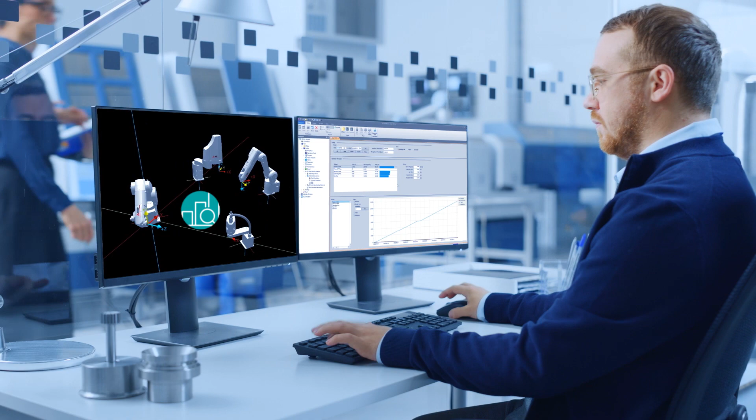I want to know the robot's condition at the time of introduction or the robot's daily operating information. Is this something you are concerned about?

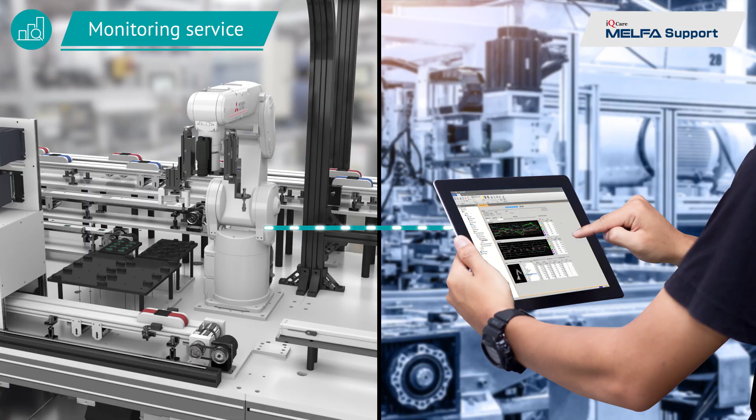The monitoring service automatically compiles the robot's daily operating information and monitors the operating information and the conditions of the component parts on a daily basis. Data related to robot operation and maintenance are automatically backed up every day. Robot operating information or controller control information can be visualized in cumulative graph or chart views. This supports analysis of operating conditions or checking whether maintenance is needed.

I'm having problems with the robot system suddenly shutting down. Is this something you are concerned about?

You can recover the settings for the robot's condition on a specific day from backup data, which helps reduce recovery time.

I want to know the timing of robot maintenance before actual operation, such as at the time of introduction. Is this something you are concerned about?

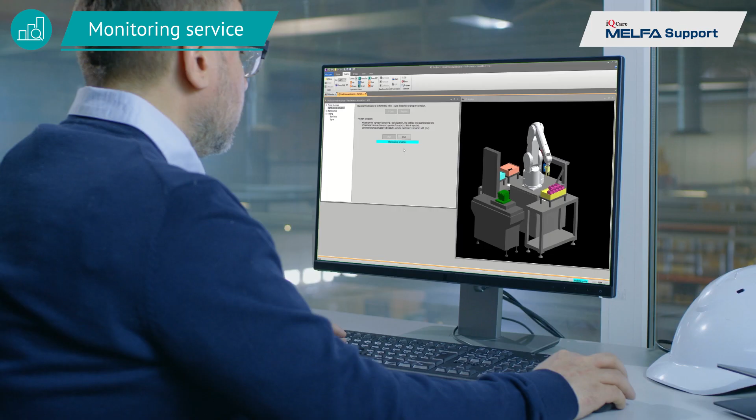The maintenance simulation function calculates the timing of maintenance through simulation in advance. Robot program motion patterns are repeated with the actual equipment or in RT Toolbox 3 to estimate when to replace maintenance parts or when to recommend maintenance.

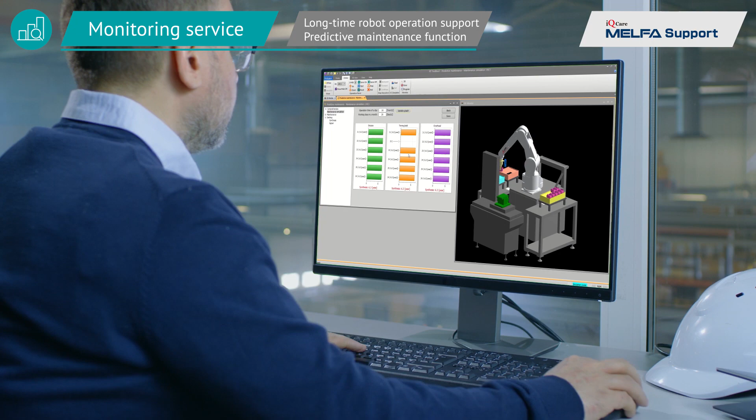I want to know about abnormalities before the robot suddenly stops. Is this something you are concerned about?

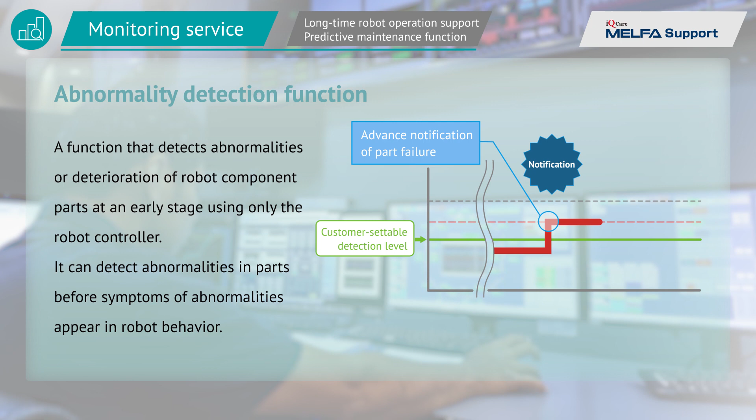The abnormality detection function is a function that detects abnormalities or deterioration of robot component parts at an early stage. It provides error notification before failure, enabling planned parts replacement. The wear level calculation function calculates the wear level of robot component parts based on the operating condition according to robot motion or posture. It reduces sudden downtime by letting you know the time until maintenance inspection and overhaul.

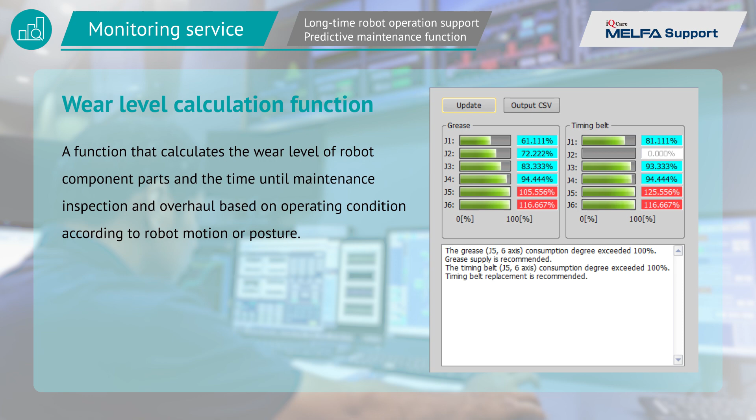The monitoring service is useful for efficient maintenance and predictive maintenance, as well as for quick resolution of problems.

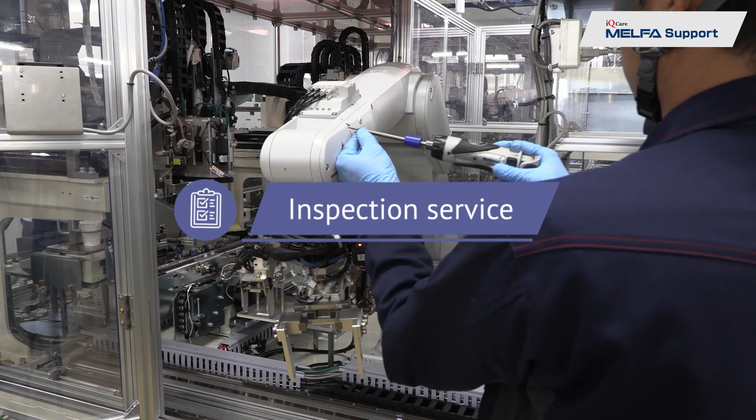I want to keep the robot in optimum condition and maintain stable system operation. Is this something you are concerned about?

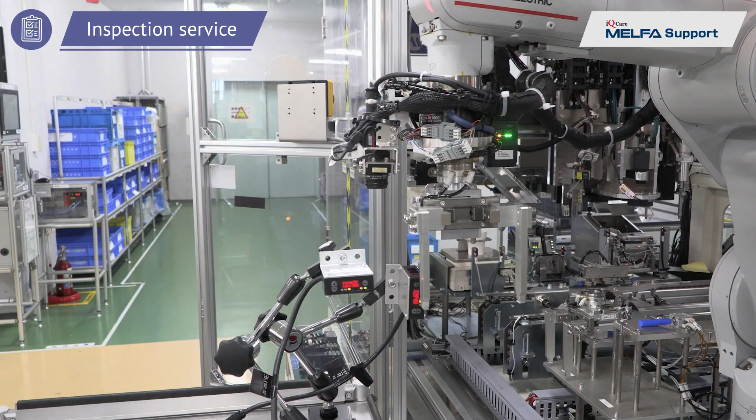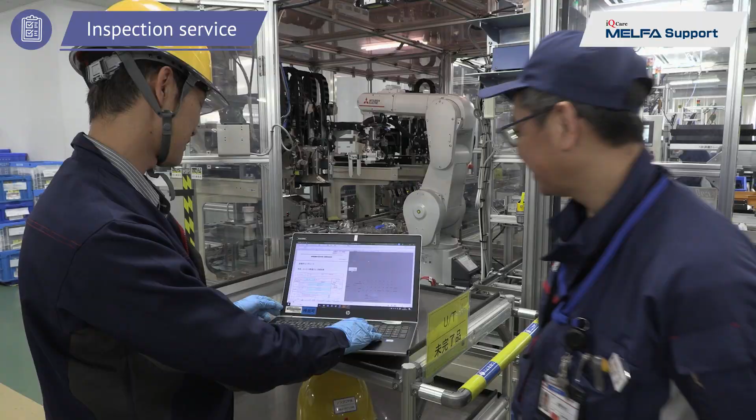With the inspection service, a service engineer will visit and perform an inspection. They will check the condition of the robot's inside and controller, and will replenish and replace worn parts. Early detection of abnormal locations through inspection enables replacement of deteriorated parts to be recommended. This helps to keep the robot in optimum condition and maintain stable system operation. Two inspection plans, light inspection and detailed inspection, are available to meet customer needs.

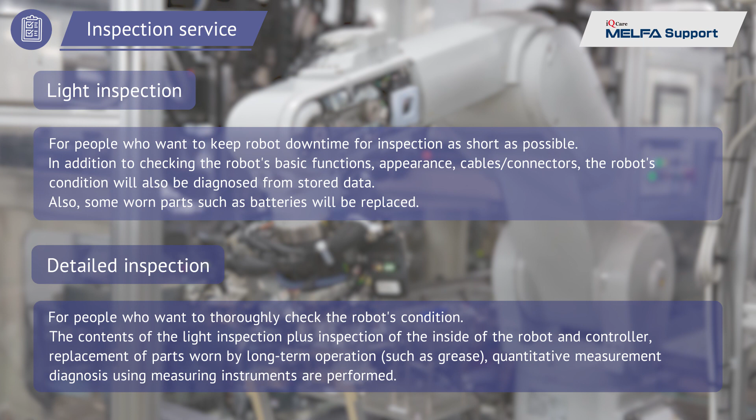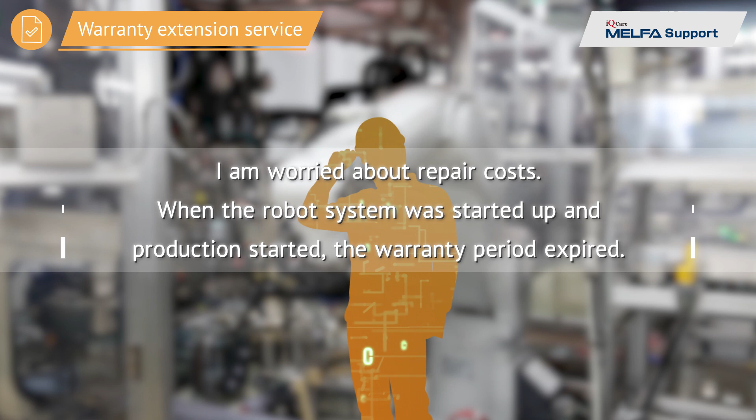I am worried about repair costs. When the robot system was started up and production started, the warranty period expired. Is this something you are concerned about?

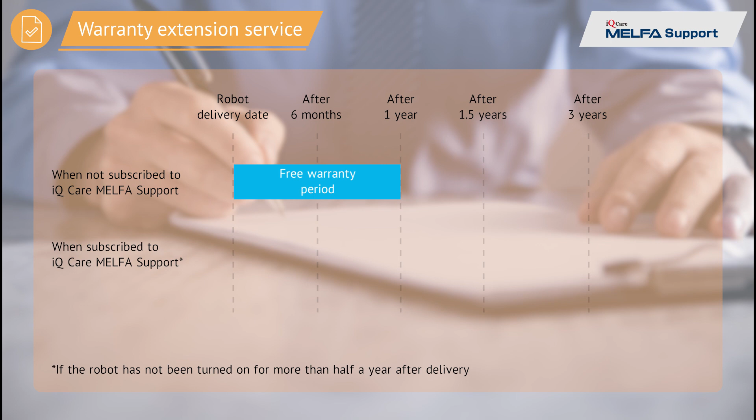The warranty extension service is a service that extends the warranty period included with the purchase of the robot, so that parts covered by the warranty will continue to be repaired free of charge after the original warranty period expires. When the extension period expires, you can purchase another extension to further extend the period.

If the robot has not been turned on for more than half a year after delivery, the warranty can be extended for up to 6 months free of charge. In addition, customers who have already purchased a robot and entered into an inspection service plan can purchase the extended warranty service if there are no problems with the robot's condition.

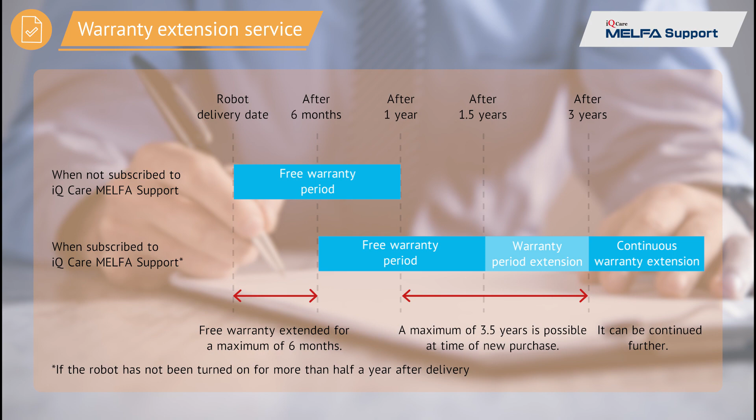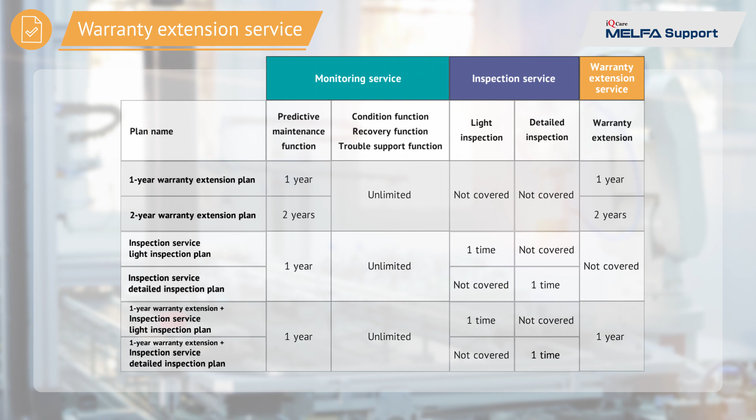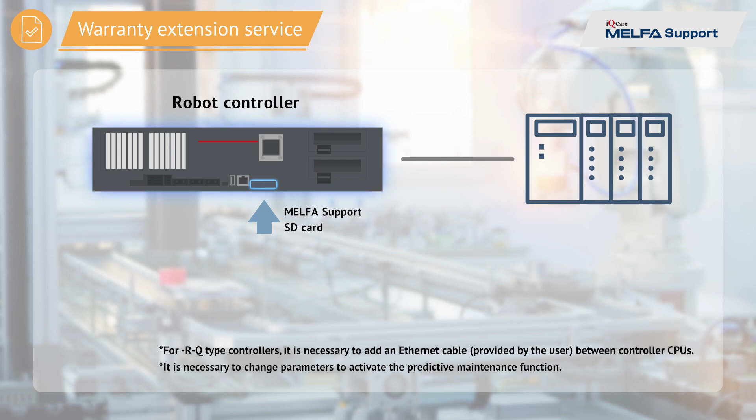IQ Care Melfa Support offers various plans to meet customer needs. The IQ Care Melfa Support software is activated when a dedicated SD card is inserted into the controller. There is no need to purchase additional equipment.

IQ Care Melfa Support supports the stable operation of customers' production equipment through the operation, maintenance, and repair of Mitsubishi Electric's industrial robots.